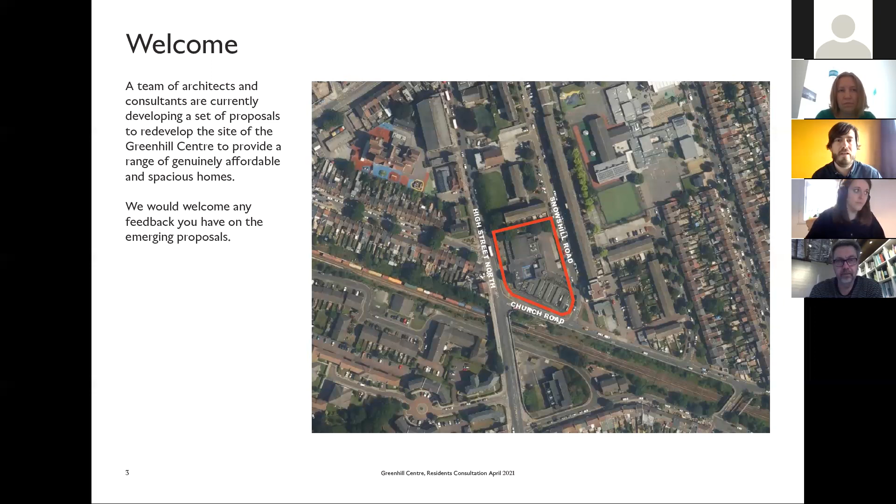I'd also like to introduce the wider design team in attendance today, who've been working behind the scenes on the project. Shortly you'll receive a further presentation from Harriet at Haworth Tompkins. We have Mike from Me Landscape Studios. The structural engineers working on the project are Graphic Structures, and our M&E consultants are Max Fordham. The scheme will be built to a passive house low energy standard, and they're working hard to ensure we can commit to a low energy building, saving fuel costs for residents. The project will also be supported by Potter Raper, quantity surveyors and employers agents.

I'll now hand you over to Harriet, who'll take you through the scheme. Thank you.

Hi, thanks James. So as James said, we're Haworth Tompkins, the architects. We have 30 years of residential experience. We're based in Kentish Town, and we often work in historic or sensitive urban areas with the desire to respect the setting, seeking an inclusive and active approach to our projects through consultation with local residents. We've included this example of one of our schemes, which is in West London, Silchester Estate.

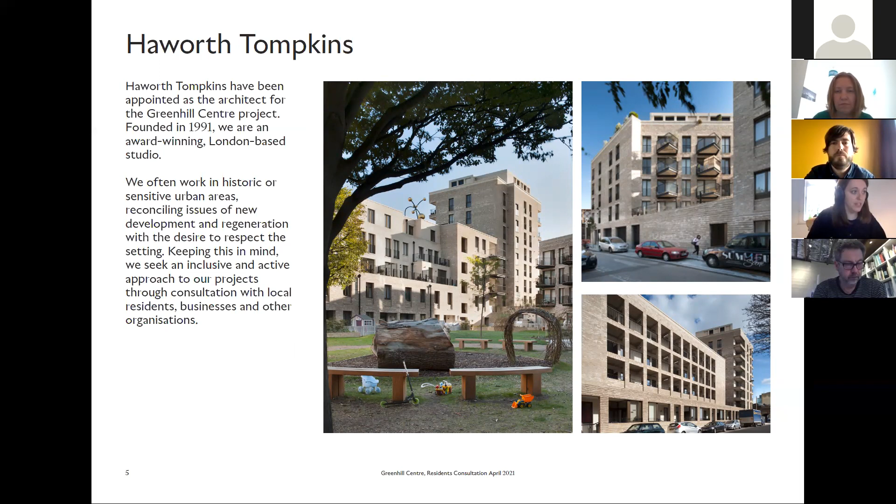And the kind of massing and the way we've broken down the massing and the building and the materiality is quite similar to the approach we're looking at for the Greenhill site.

So I'll just run you through the site today. We obviously went through this at the last residents consultation, but just in case there's anyone new here.

So the site itself sits south of Manor Park TfL Rail Station, and to the west we have Woodgrange Park Overground Station,

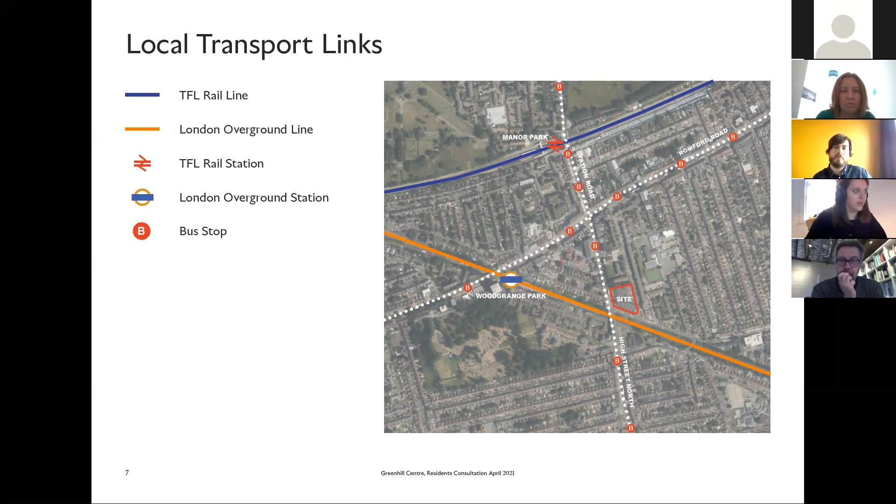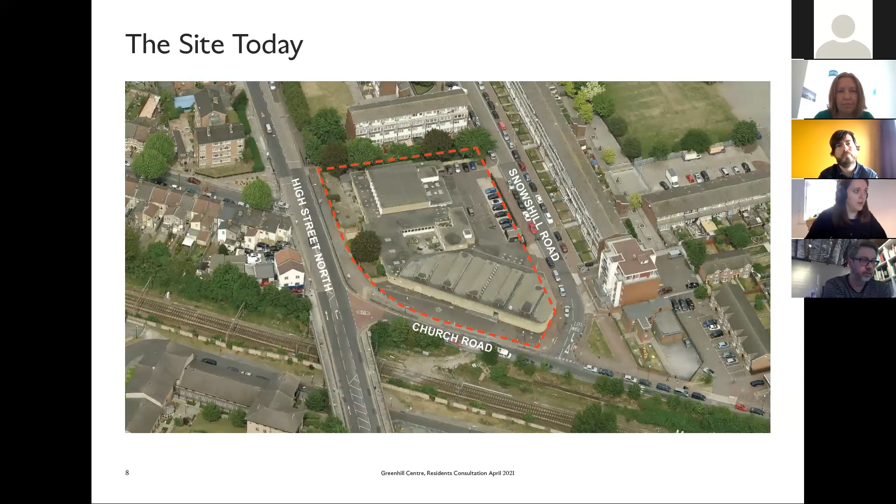and then there's also a number of bus stops quite close to our site. As James mentioned, the existing building currently houses the gym, which we're looking to re-provide for our proposals, boxing club, GP surgery, and it's also bordered by 3 main roads, which I'll go through in a little more detail now.

So the first road is High Street North, which has a number of quite nice listed buildings and locally listed buildings, and really is a high street in nature.

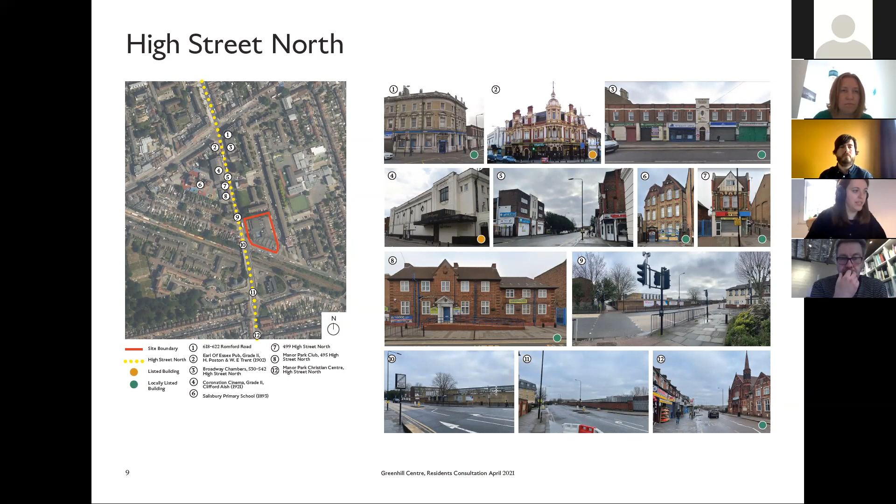And then when you get to the Greenhill Centre, at the moment it's quite a blank facade, and it doesn't really add much to the active nature of the high street. So we're going to be looking to improve that.

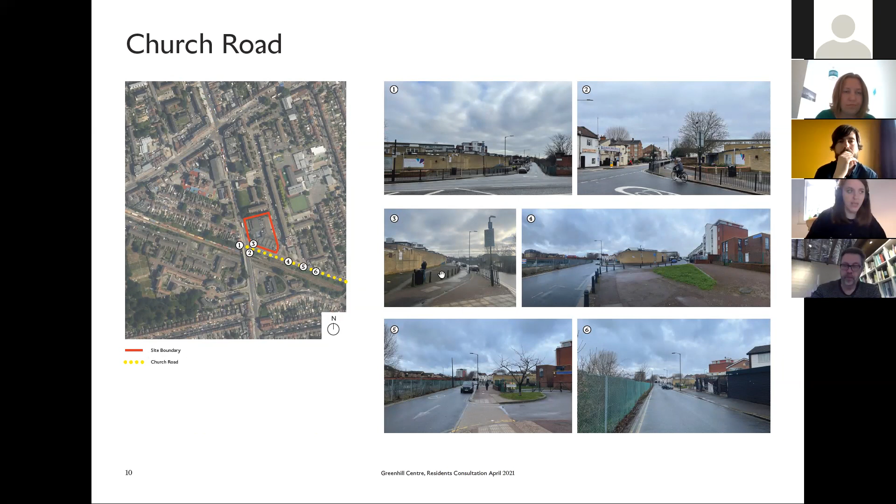As you go around the corner onto Church Road, there's a slope in the site and quite a wide area of pavement, which you can see running from the existing blank wall of the gym to the road. We don't think this is that successful in terms of adding to the high street, so we'll be looking to landscape this area and also provide an active frontage to our building on this road.

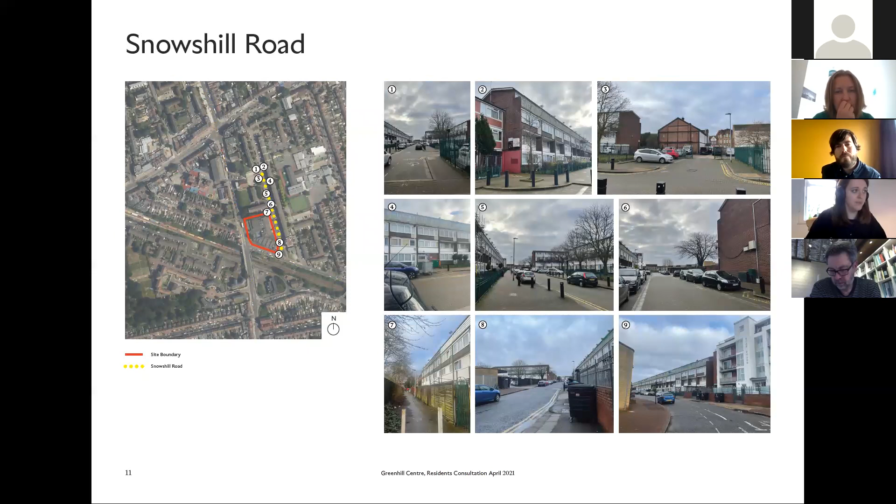And then Church Road also has the railroad to the south, which I should have said. Going around the site, we have Snowshill Road, which is a bit quieter in nature and more residential. You'll see how we've stepped our massing down and responded to the maisonettes on this quieter road.

So opportunities and the brief for the site: we're looking at around 80 homes, 90% dual aspect homes, which are nicer homes, and 39% family homes, so that's 3-bed properties.

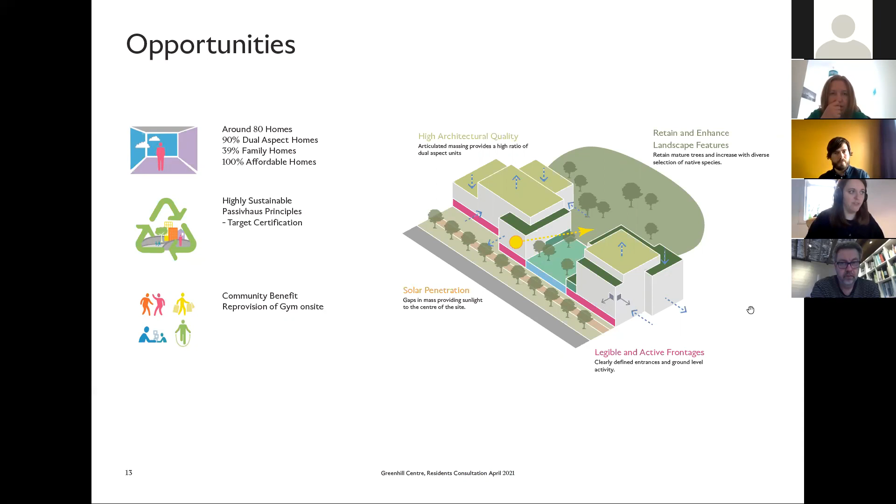And as James mentioned, the scheme will be 100% affordable, split 70% London affordable rent and 30% shared ownership. The project also aims to be highly sustainable, with the homes targeting Passivhaus principles, and the gym we're re-providing on site will be BREEAM excellent.

So looking at the site, there are a number of factors to consider. There are 5 mature category B existing trees on site, which we straight away wanted to keep within our proposal. There are noise pollution considerations from the railroad and High Street North, and also a number of neighbouring properties which we needed to consider in terms of daylight issues to those properties.

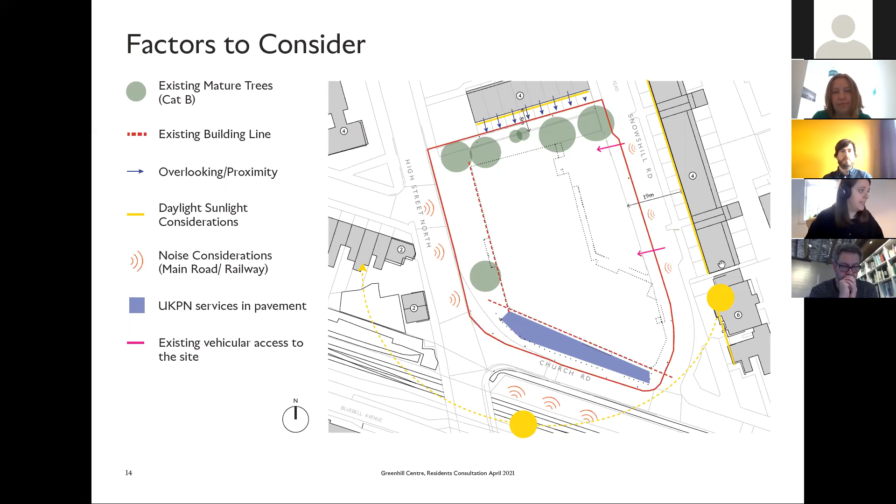So these are some diagrams which explain how we developed our design. The first one shows that we're retaining the existing mature trees and using them to enhance our landscape proposal. We then have a residential courtyard garden in the centre, which is protected by the 3 buildings.

As I mentioned when going through the site photographs, we're looking to have active frontages on the main facades facing the street, with the gym sat in the middle of the 3 residential blocks, adding to that. We're looking at residential entrances and through-cores, so you can get through the core of the building if you're a resident straight into the garden.

In terms of servicing and parking, there are 2 existing vehicle entrances to the site. We've kept the one to the far north, which will be access to 3 accessible car parking spaces, and I think the location of this will minimize disruption to traffic on Snowshill Road.

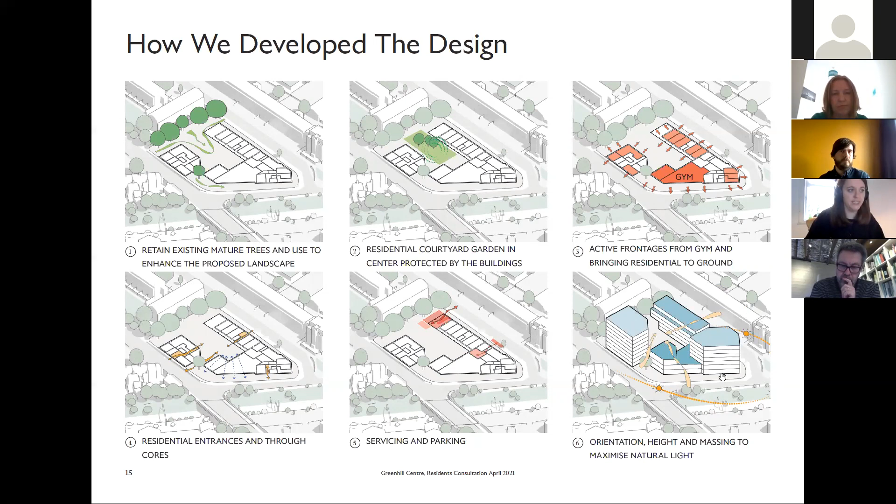And then the last one just shows the orientation, height and massing, which we've been trying to develop to have the lowest impact on surrounding neighbours, whilst also creating an enjoyable communal garden for the new residents of the scheme. We've been working very closely with our daylight consultants to ensure the daylight levels to both the surrounding properties and for the new development.

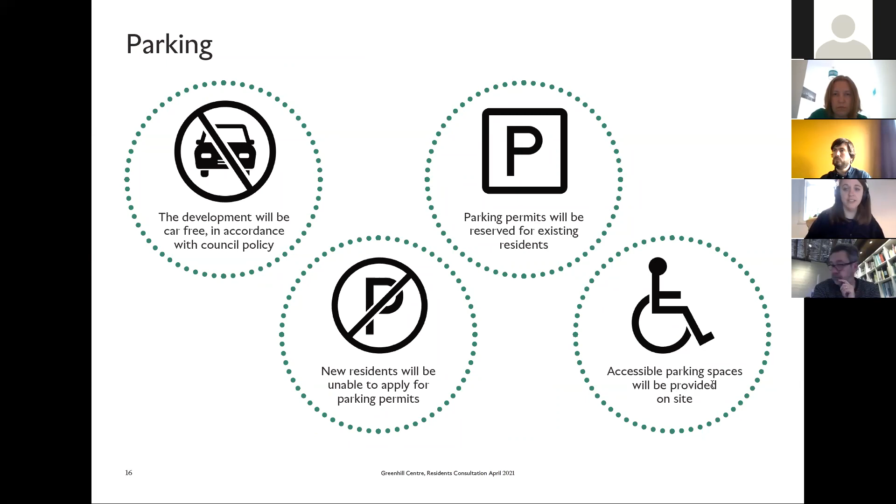So I mentioned parking then, but the development will be a car-free development in accordance with council parking policy. This means that new residents in the new homes will be unable to apply for parking permits, and parking permits on street will be reserved for existing residents in the area. But we will be providing 3 accessible parking spaces on site for residents in the new proposal.

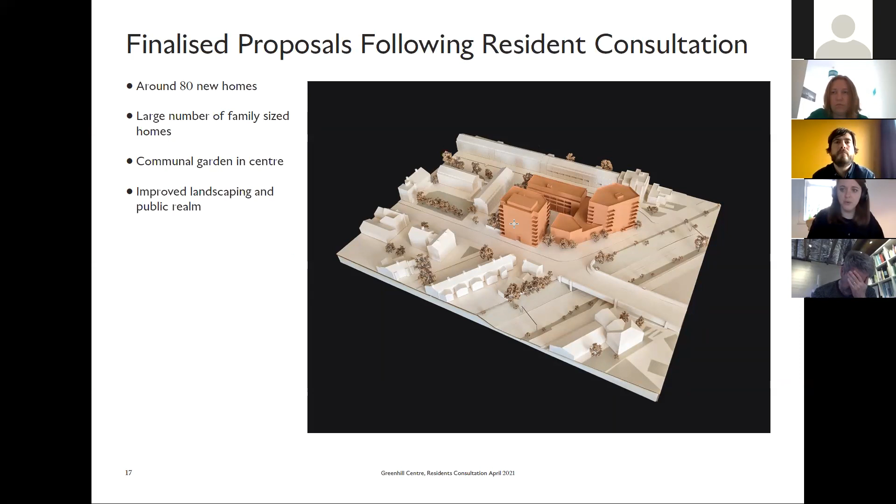So this is our finalised proposal following previous residents' consultations and taking on board discussions that we've had previously: around 80 new homes, a large number of family-sized homes, as I mentioned, and improved landscaping and public realm, not just on our site, but extending to the neighbouring areas of our site, which Mike will go into in more detail in the landscape section of this presentation.

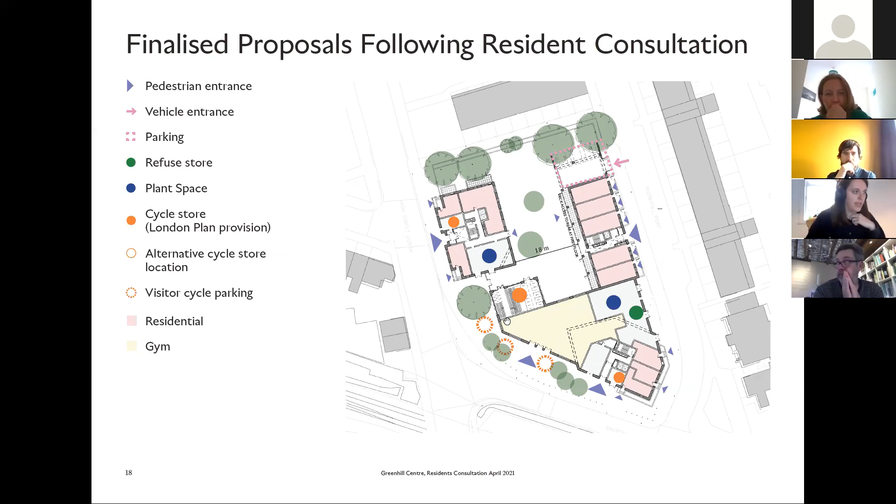The gym will go over ground and first floor, taking up that footprint on the first floor as well.

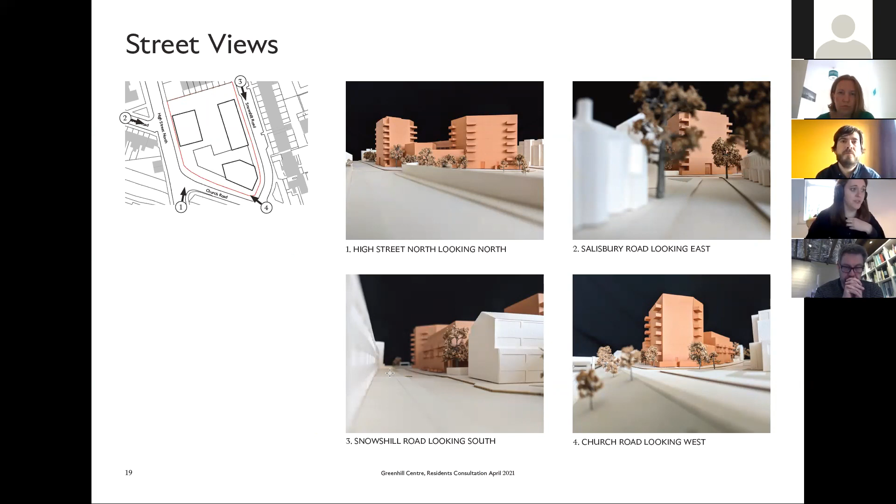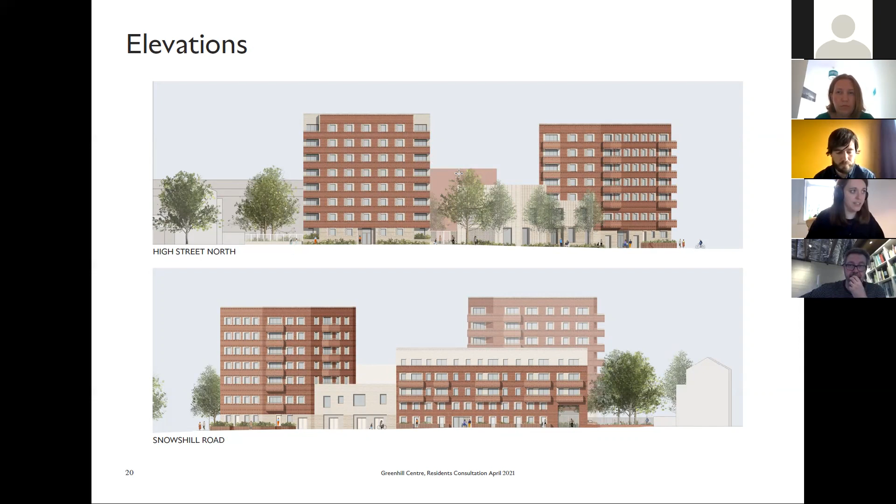One of the changes from the previous version was that we're looking to close Snowshill Passage and make improvements to the passage just to the north, next to the existing maisonettes. This allows us to incorporate a larger space within the courtyard, and also provide improvements further to the north, working with a local group on those improvements and looking at a play space shown on the next sheet next to the maisonettes, which came out of consultation with local residents and residents in the maisonettes.

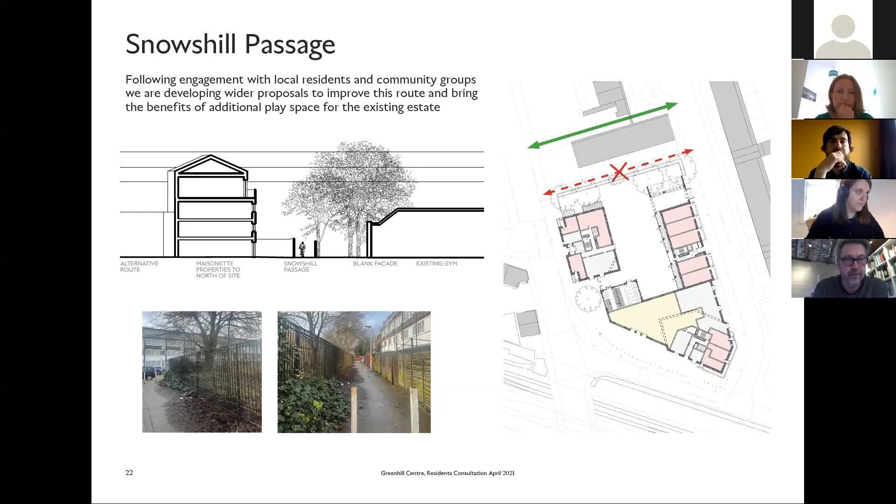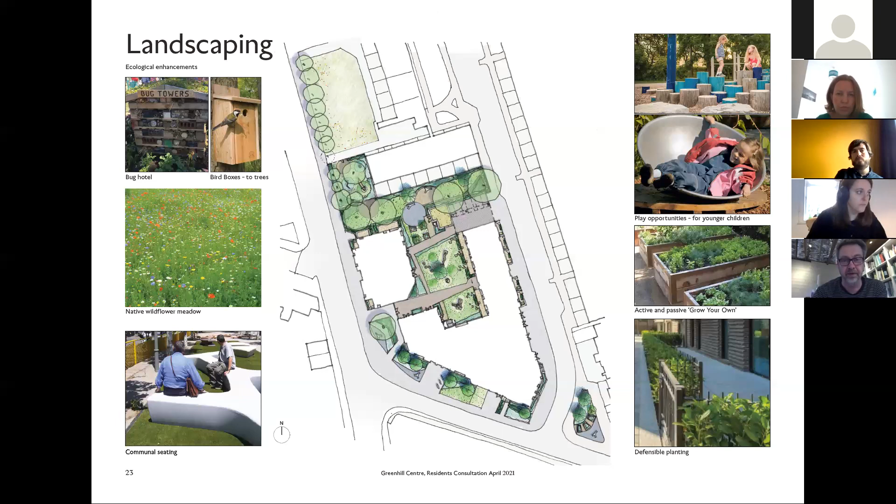The next sheet is just showing some of those possible landscape ideas, in a bit more detail for the play areas. So we have more natural play elements like play logs and play boulders, and various timber equipment for younger age groups to have imaginative play, as well as more traditional elements such as the swings, etc.

So that will all be set within a landscape area with also a range of plant species which provide sensory planting ideas as well - touch, smell, etc.

And I'll hand back to James.

Thanks, Mike. So just to summarise the presentation so far and some of the benefits of the proposals: we're looking at delivering around 80 new homes, with a 70-30% split of London affordable rent homes and shared ownership, which in planning terms means they're 100% affordable. We're looking at a high proportion of family homes, around 39% is the target for the London affordable rent schemes.

And we're looking at making a positive addition to the high street, as Harriet explained, improving the active frontage around the current gym on the High Street North.